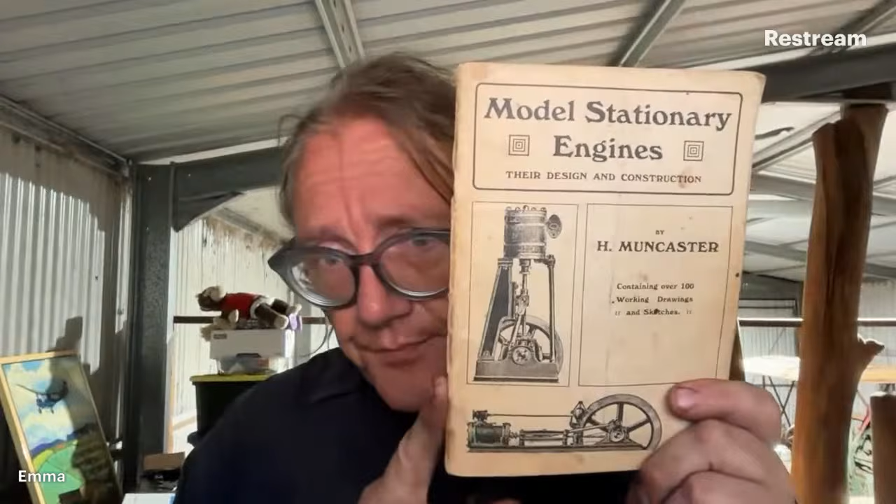What else? Spontaneity can be fun, yeah. Okay, well, maybe a steam engine project, because we don't have enough of those. Muncaster's engine, because the book's right here on the bench. Right, this is Muncaster's book. Right, this little engine on the front.

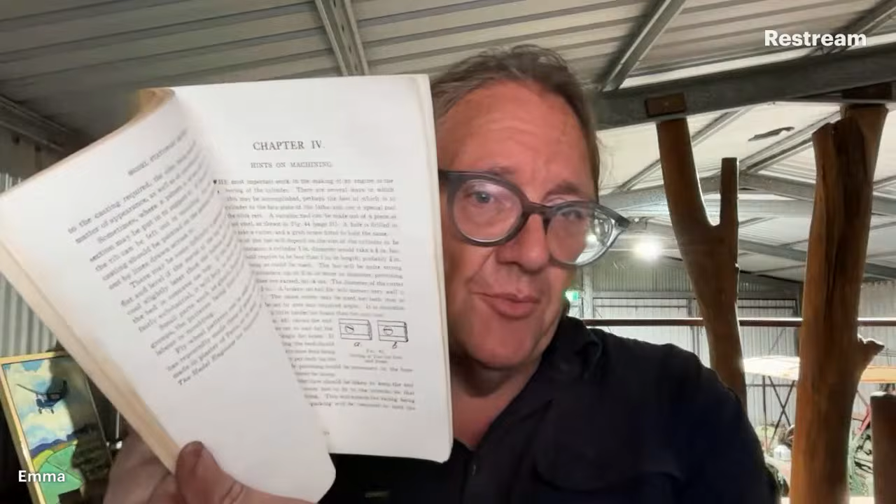Herbert Muncaster wrote for Model Engineer for many years. This book was published as some of his articles, or some of the more interesting articles that he wrote on engines. I've had this book for years, I think it's out of print now. But Muncaster, some very good engines. There's an introduction to pattern making.

Moulding and pouring, and hints on machining bits and pieces. And a lot of mostly fairly terrible drawings.

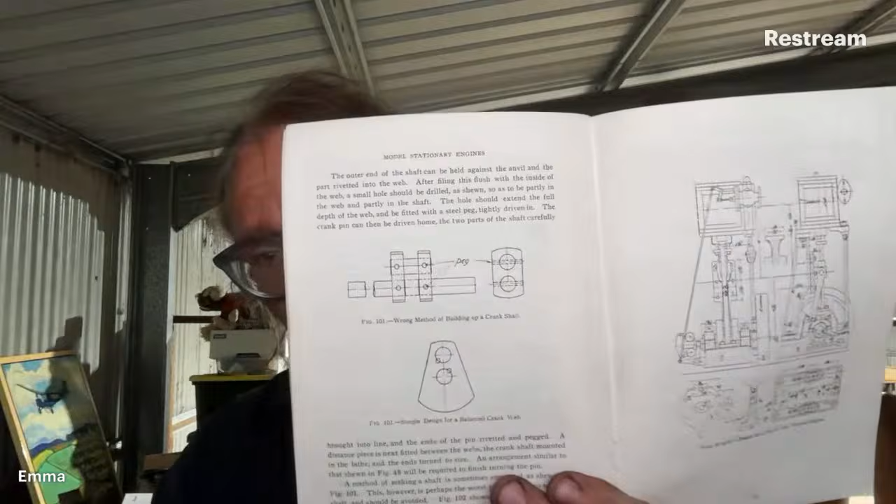Oh, look at that, so I made a start at this. Whoa, I'm going to turn that on. I'm not sure, is that better? That's probably better. I made a start on this engine some time ago.

But because there's about 5 drawings for different engines of a similar size that have the same parts in them - hey, Randy - you've got to look on a different drawing sometimes for the right bits.

I'm not sure what I want for launch without going down a rabbit hole, James, of actually thinking about projects that I probably should finish. I'm not sure I want to go there.

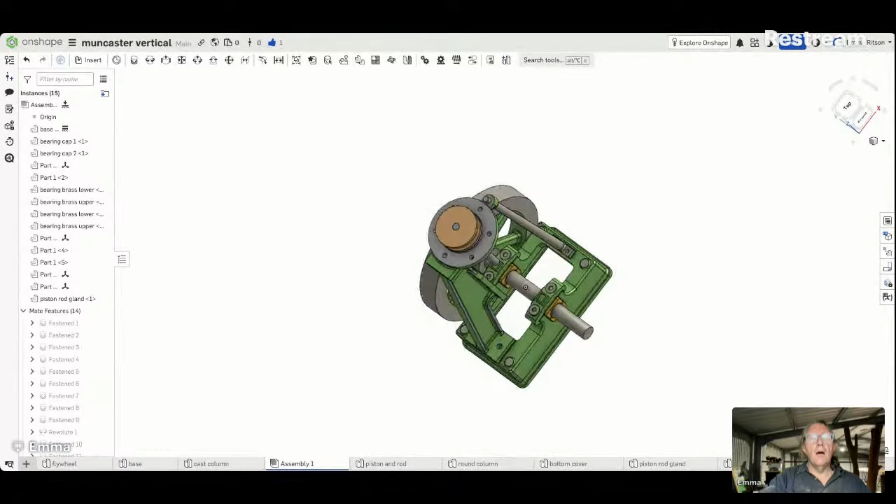So this is where I got to with this. This is quite a pretty engine.

It's the thing about Muncaster's engines as compared to some of the others, is that Muncaster didn't design toy steam engines. He designed proper industrial machines.

Proper industrial machines, to industry specifications and cutting edge steam engines, because this article was written, and the book was designed 1905, something like that.

Have a look here, first published 1912, this book. But I think that they were well and truly back issues of Model Engineer by then.

Looking at this, it needs a crankshaft is what it needs. We've only got a solid shaft through here. We've set it all out properly. There's our flywheel there on that tab, and our base, and the big cast column on the side, piston and rod, and the round column on the other side, and the bottom cover, piston rod gland, crankshaft, bearing brasses.

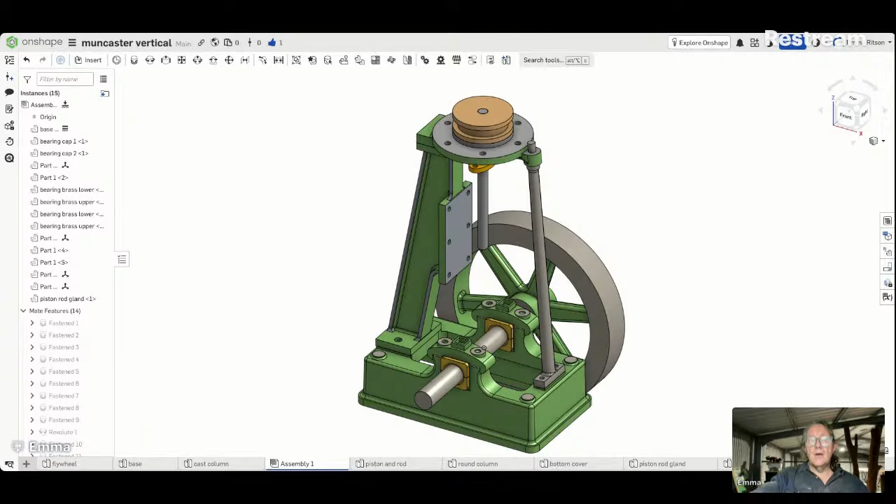So if we start here on the crankshaft, we've only got to change this and refresh the assembly drawing, and it'll refresh in the assembly. But we need some information before we do that. And I'm going to take my glasses off here because I can't see a thing.

And back to back on this 1 5/16. According to this, it's 3/4 inch throw. It's 9/16 between the cheeks, and 1 5/16 overall. That should be pretty straightforward.

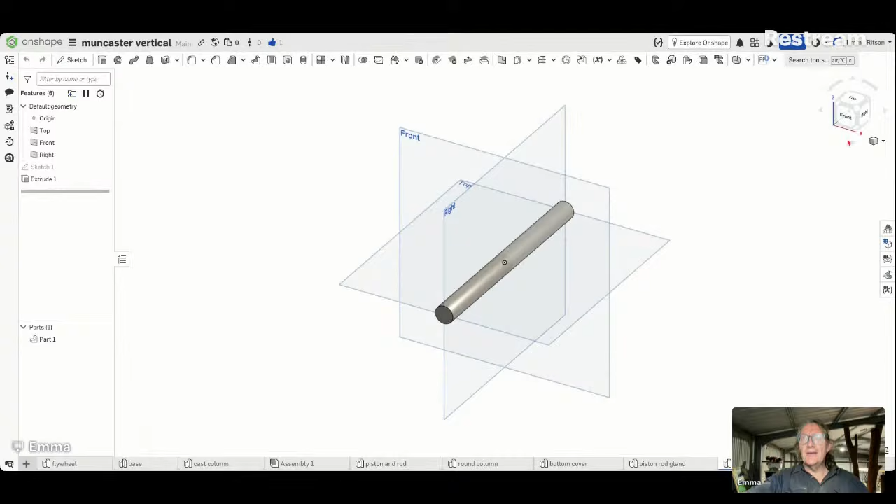If we draw a picture, click here where it says front. I'm going to draw a sketch on this end, on the centre there, and a circle and a construction line. 1.5 inches is our throw.

Now we can draw another circle there. If we get rid of the construction line, we can draw another circle here where that intersects, and we'll call that 1/2 inch. We're going to do this way.

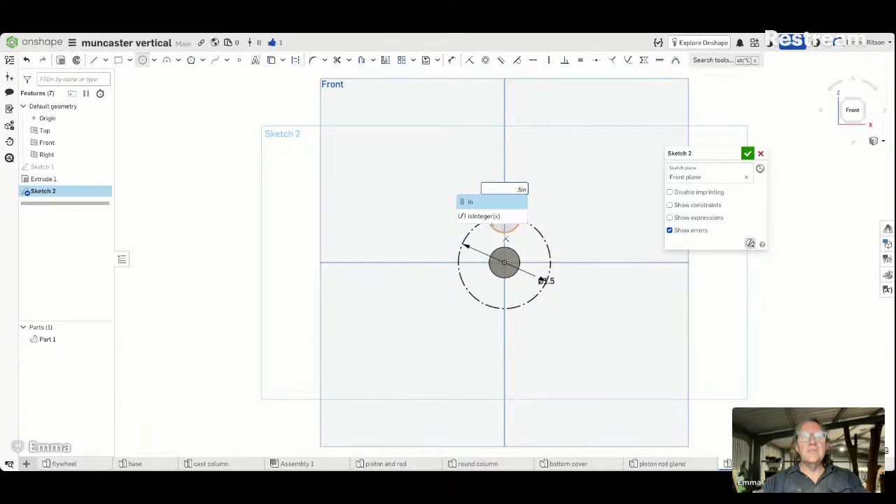What happened there? Don't know. This might be already set up, I think, for... So there's our centres. The crank webs, there's a picture of how to fabricate up a balanced crank web. We're going to try something like that.

Must be big enough to go. We'll draw another circle. That looks about right. 2.125, let's do 2 1/8, let's call it that.

Not quite big enough. This measurement here, we can just drag that around where we like. 2.25 we're going to try. That looks better.

And he's drawn a line down here, something like this. It doesn't matter much what it is, and we could work out the balance if we wanted to, but that looks reasonable there.

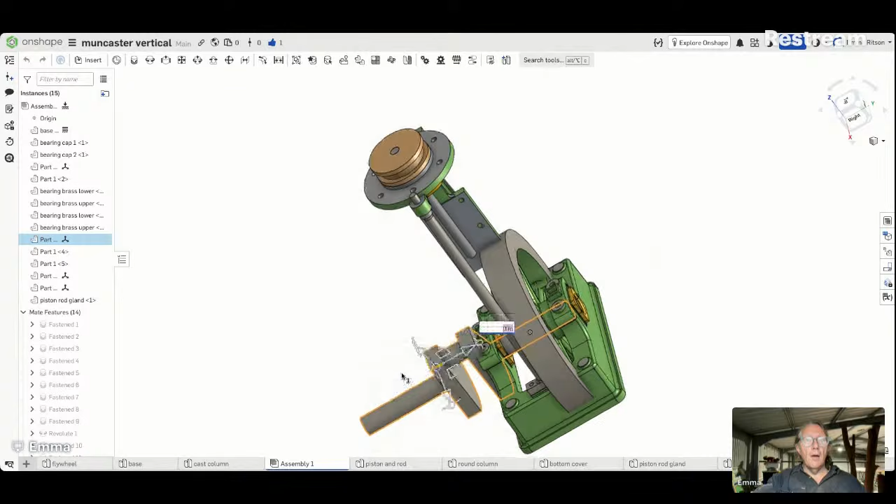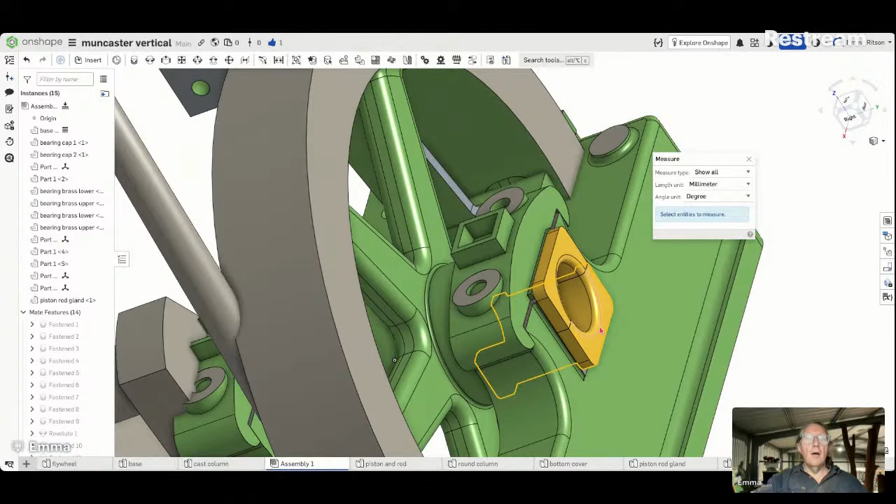Because it didn't work. I'm going to measure this while I'm here. There's a radius on there. So we need to find that radius before when we put it back in, or we'll have some interference.

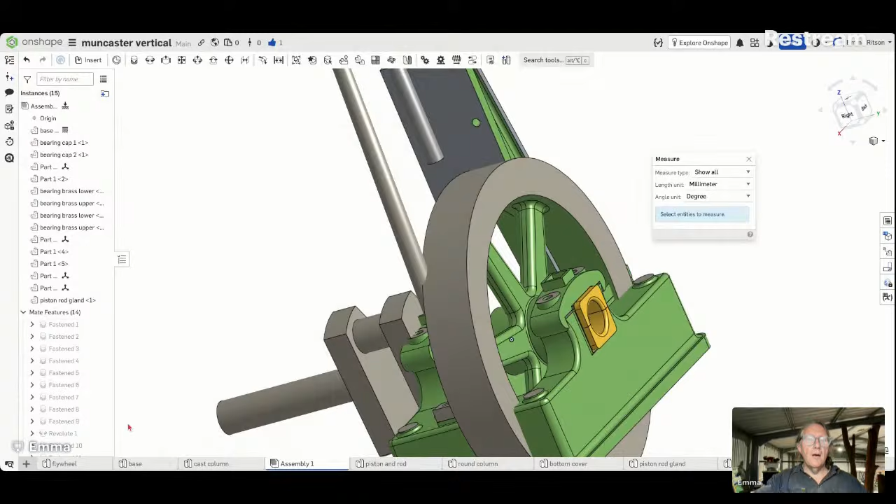Now, this is fastened somehow, Revolute 1. Is that the right one? That's the correct one.

So let's edit that. Let's move it from the center of the crankshaft to there. That's not how we want to do it. That's still not quite right.

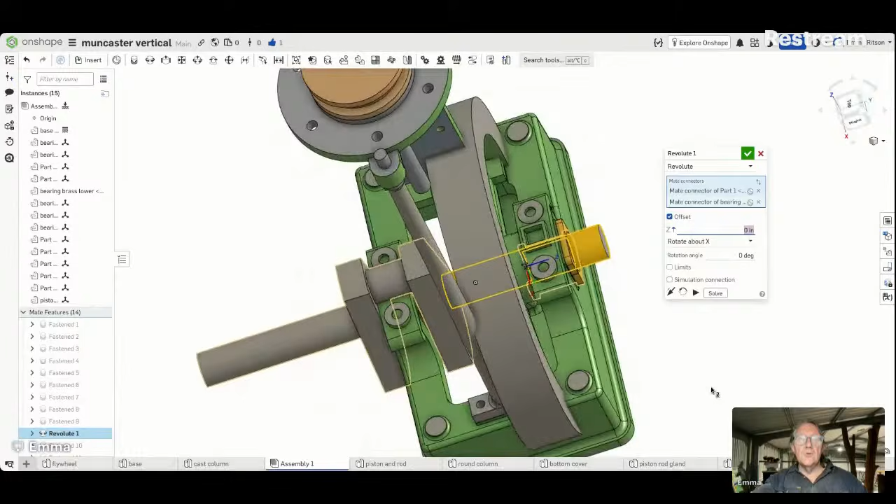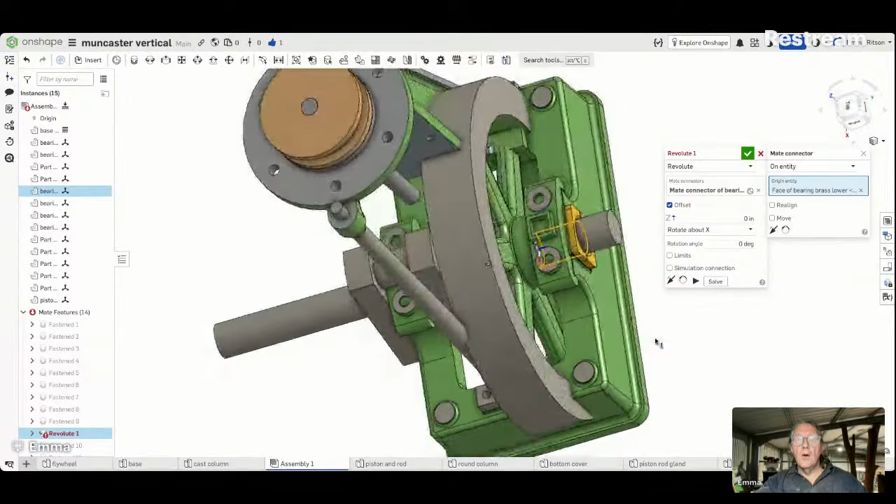But what we want to do, and find this. Not there. Let's just get rid of that. We'll get this back here out of the way, and then we'll set it up properly.

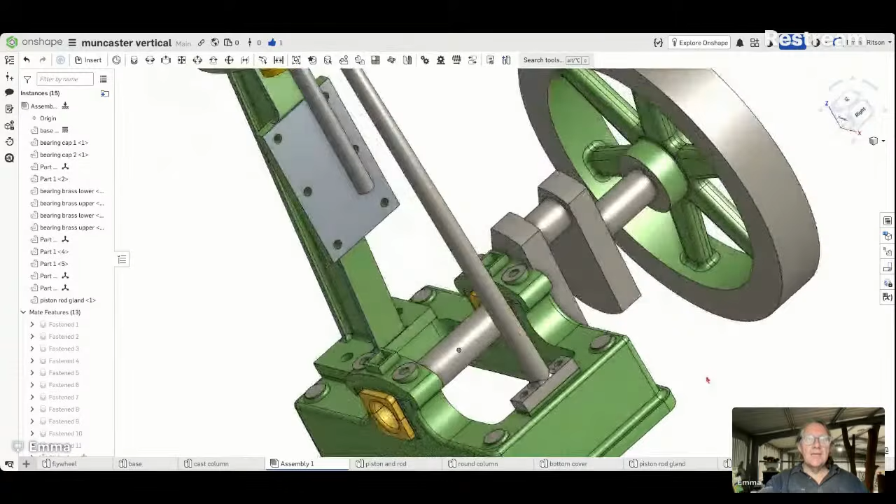So a new revolute mate, so that it turns on there. Is that right? No, that's not right. It's this one here.

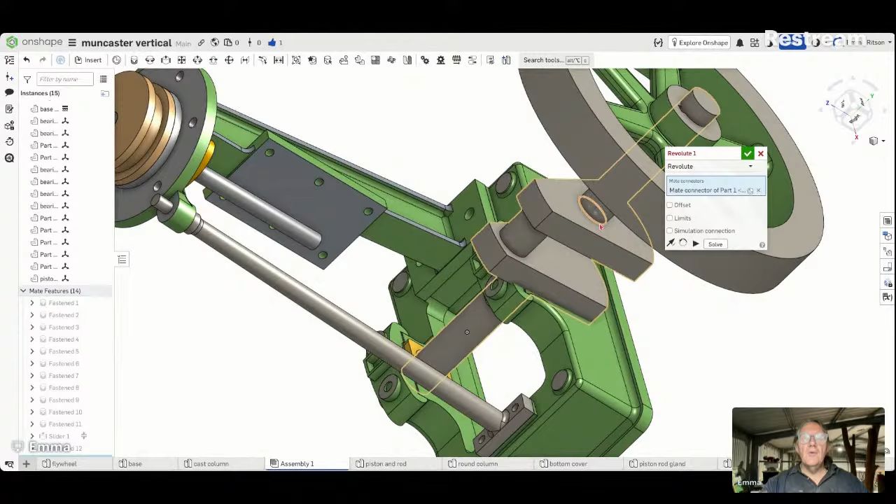See, I'm a bit sort of, I really appreciate people in the chat because it gives me someone to talk to. What we really want to do is set this up here on this edge of the bearing.

Interesting. Why won't it do that? It's a split bearing, of course.

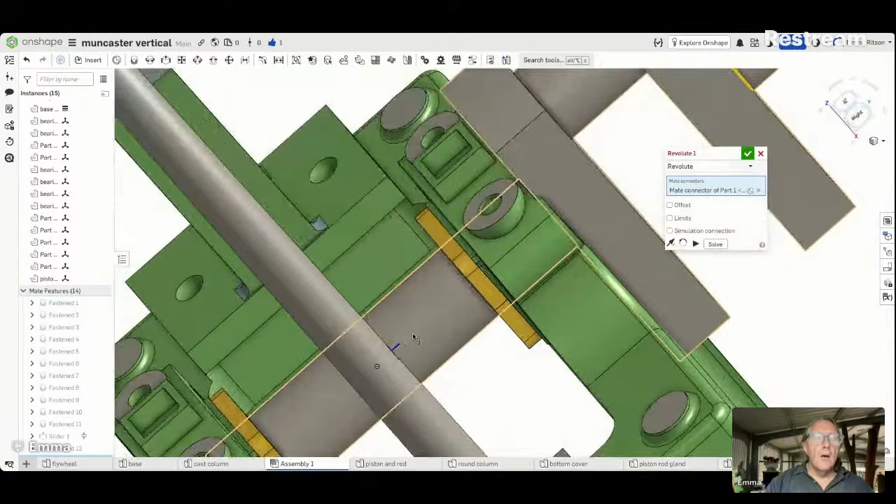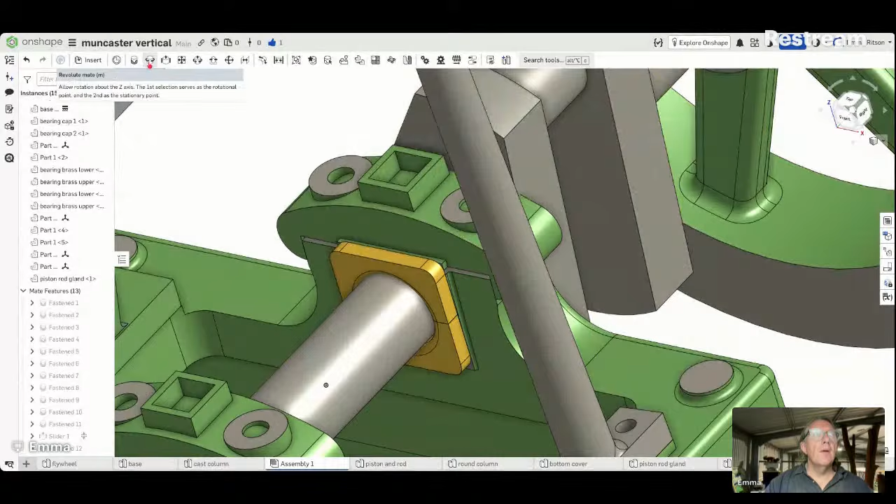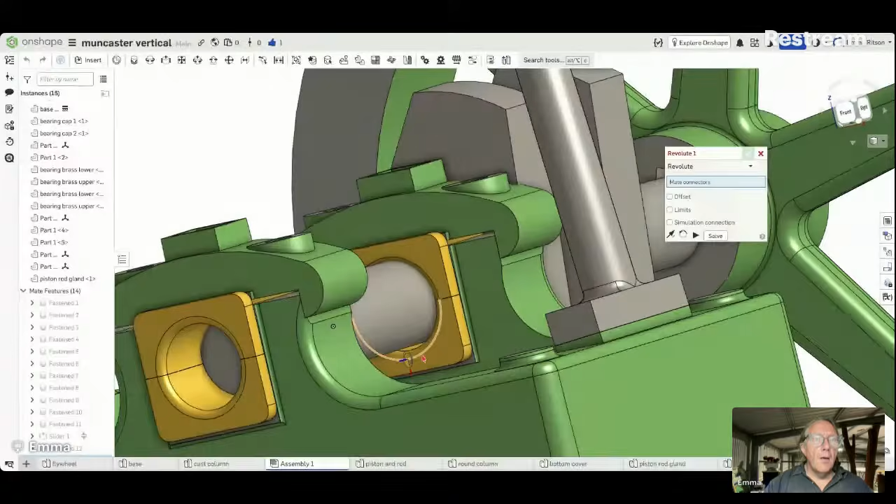What a revolute mate, off there, off that radius. And that's not it. Why is it so? Let's try again. It doesn't like me very much tonight.

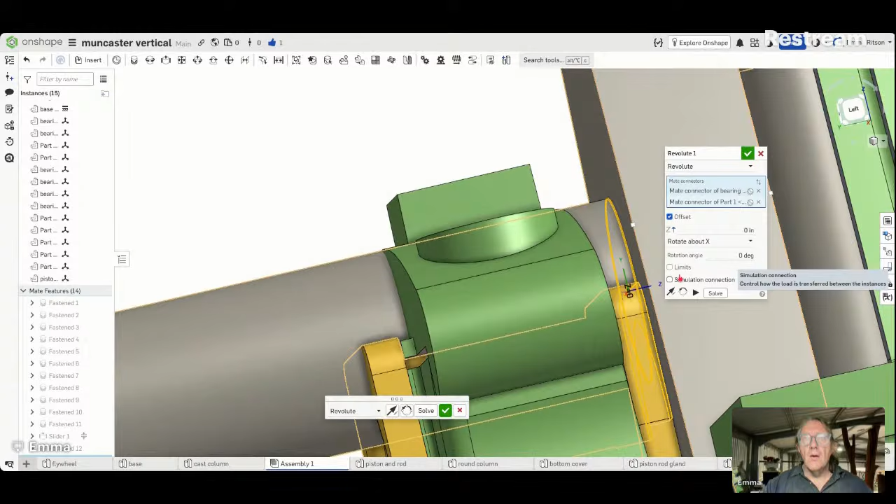I think we're going to live with that and probably just offset it. That's a bit terrible, but in the Z direction. It doesn't work. Let's get this out here so we can see it.

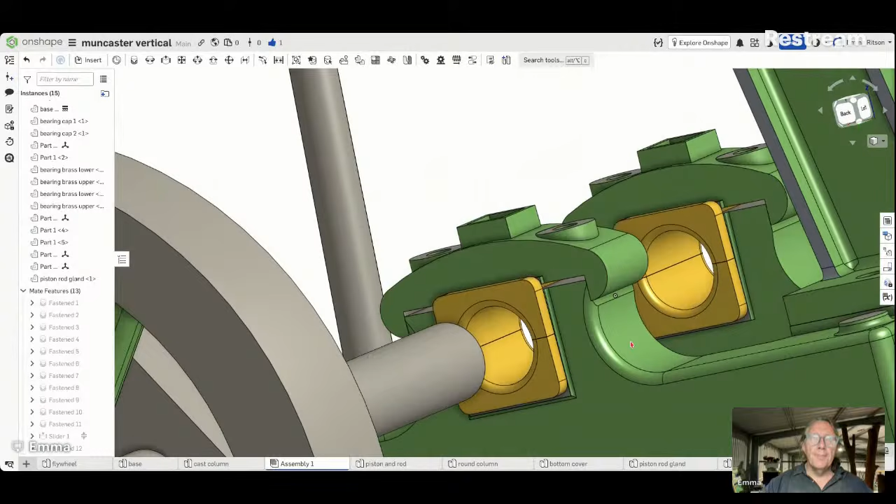We can skid it out because we've got split bearings. We need to find a center that we can work on. And probably the best way is to put a mate in there first. That's easy, see? If we put a mate there, on the origin entity there, and click OK, we've got a mate there permanently.

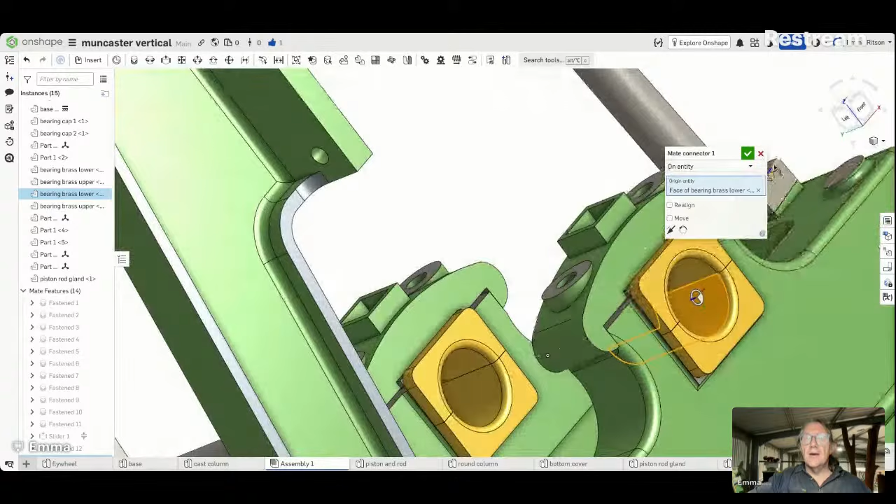And now we can put a Revolute mate connector between this one here and this one here. It's not quite right because we haven't allowed the thickness of the bearing.

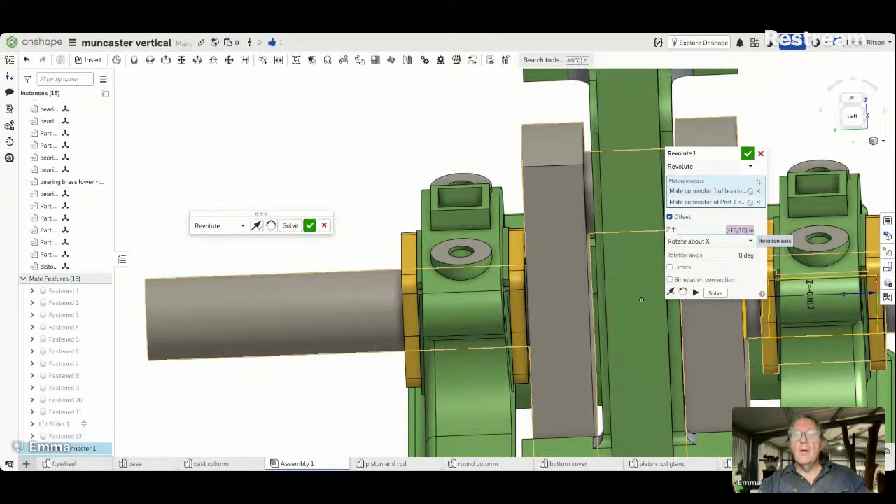And the thickness of the bearing is 13/16, so we can certainly offset that. 13/16, like all oldie worldy measurements.

So there we go, the crank's in place. Not quite right, is it? This works here, but this one doesn't. So we've got a gap there.

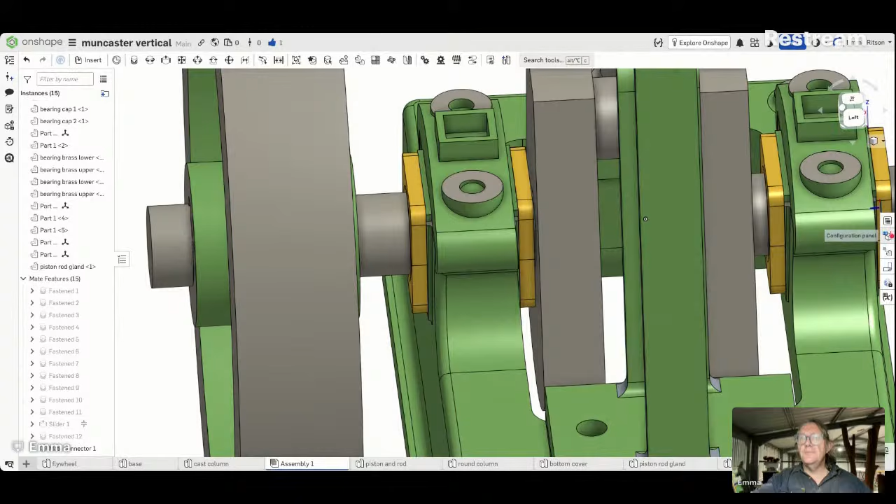If we measure that, between there and there, which axis is that? In inches. That's the y-axis, is 107 thou.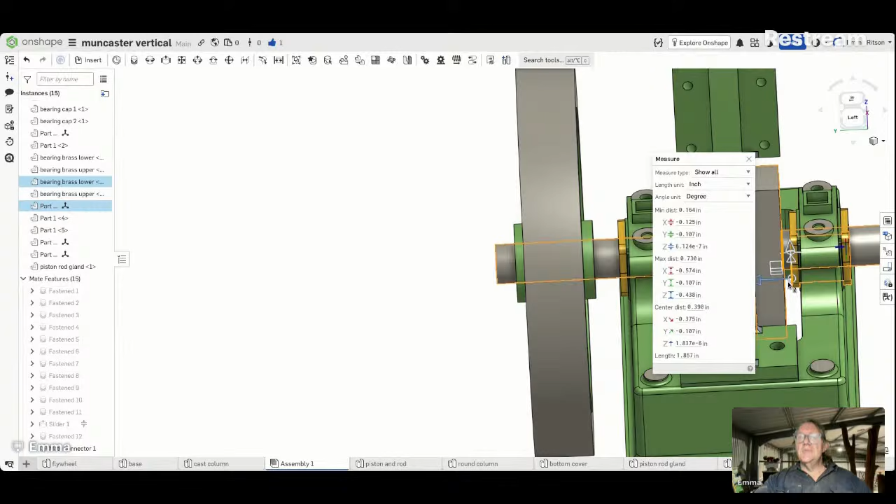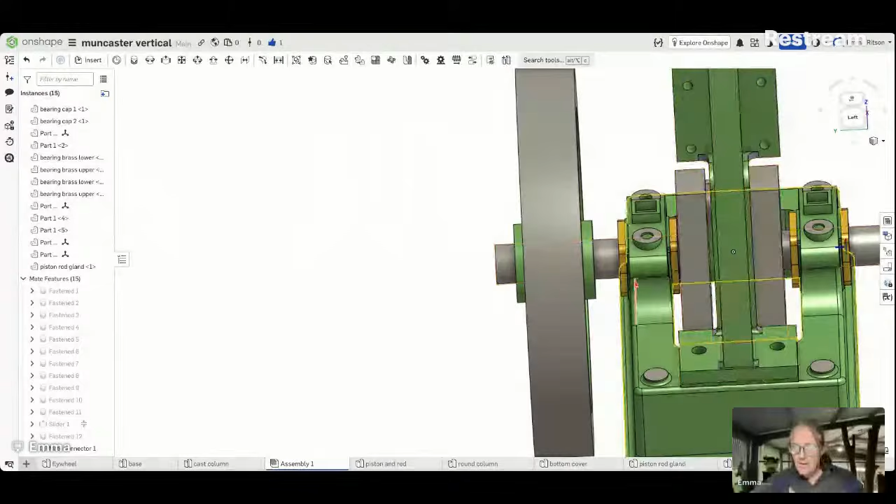So what we're saying is that this crank is 107 thou too narrow. You take care, James. I'm pretty good at talking to myself. That's kind of all we're here for.

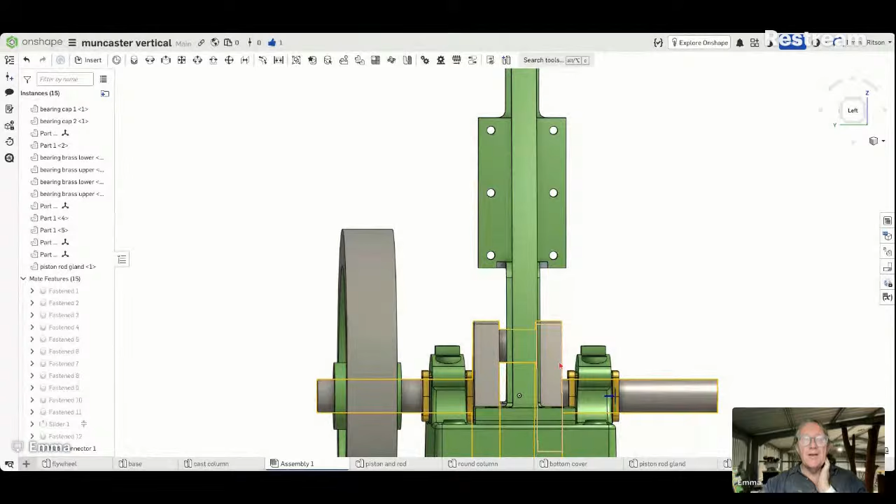So look at the left here and see if it's actually offset. It is. But these need to be a little bit thicker. And it's 53 thou, something like that on each one. And have a look.

Let's extrude 2, we'll edit that. 428 thou, is that right? 0.428. Let's have a look at that.

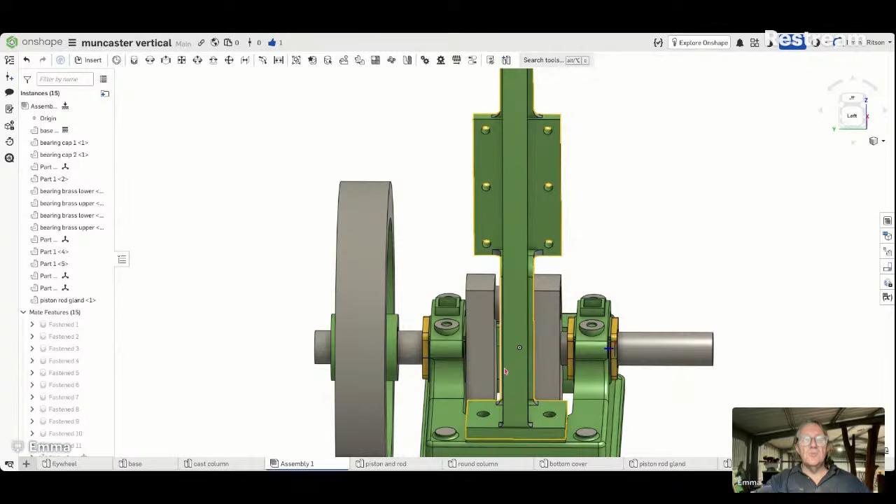Something's not quite right because it didn't readjust itself. It should have moved that way. Let's have a look here.

This says 13/16, is that what it says? It's very small print. Definitely says it's 13/16. Let's have a look here. This says 750, so that's why we've stuffed that up.

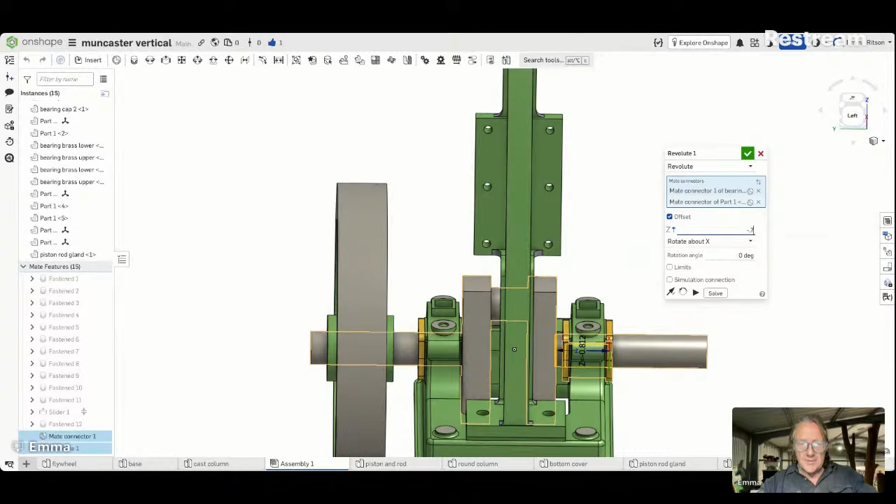Let's do it again. 0.75, there we go, fix that. Almost fixed it.

Why is that so complicated?

Have a look at this. We're going to measure and tape out again and measure between there, and there. Inch and 7/16, 1.438. Why is that so?

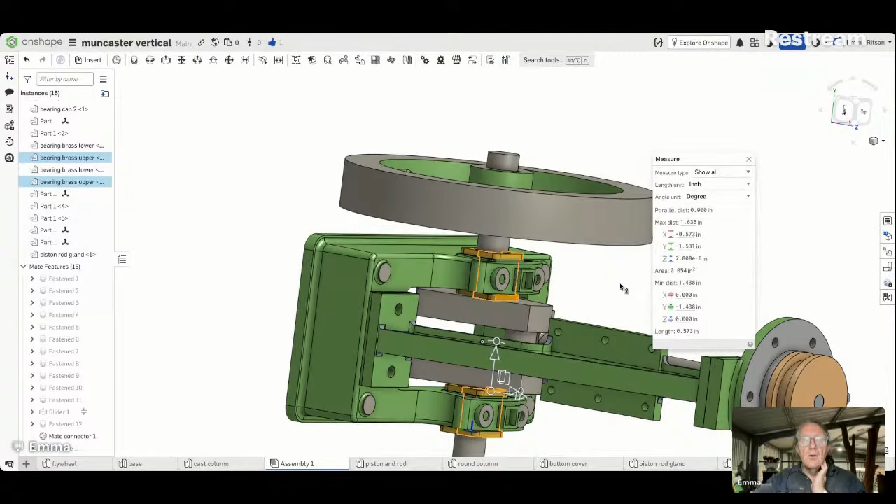Okay, let's go back to the start and try again. We're getting nowhere fast here. Let's measure this distance, this distance. We're out, nearly 1/16 of an inch.

So extrude 3, extrude 2, edit that. Inch and 7/16 we said. Half inch is 8/16.

It's 16/32. And 7/32 is 23/32. You gotta love fractions.

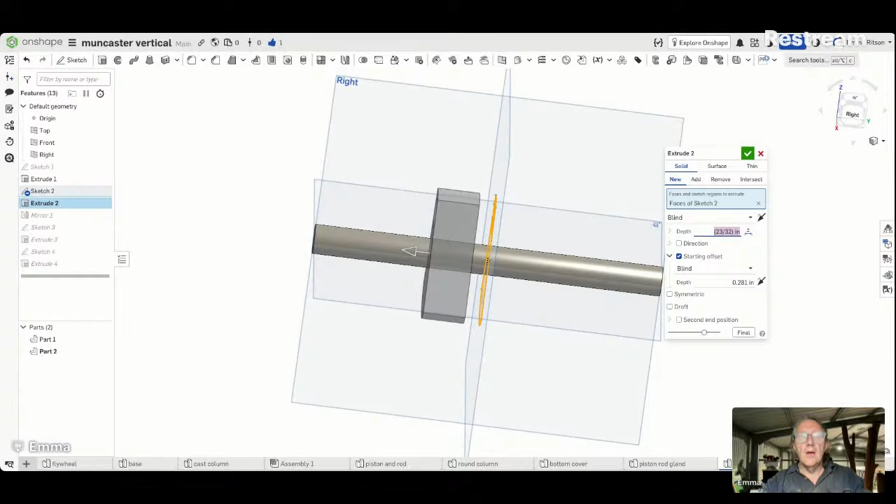And it looks nothing like it should look. Not even close. Are we ready to give up yet?

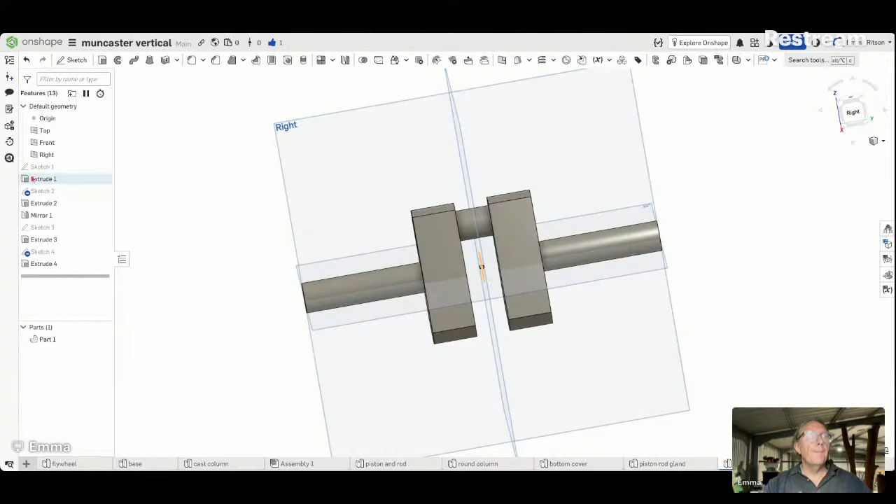23/32 must be right. Inch and 7/16. Inch is half inch is 8/16. A half of 1 inch is 8/16. Half of 7/16 is 7/32. So 16 and 4 and 3 is 23/32.

Let's do this differently.

If we do that and put that in there, how does that look? See, it fits, very close it fits. It does fit because we're over this one a bit and we're under this one. So that's right, we got that measurement right.

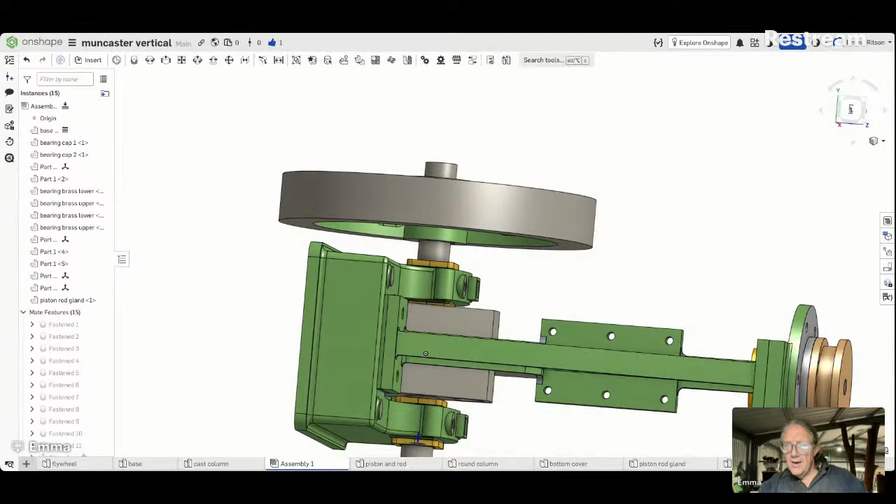Leanne, we're not doing very much, to be honest, darling. We're fuddling about is what we're doing. I've come into this without any thoughts about it all day.

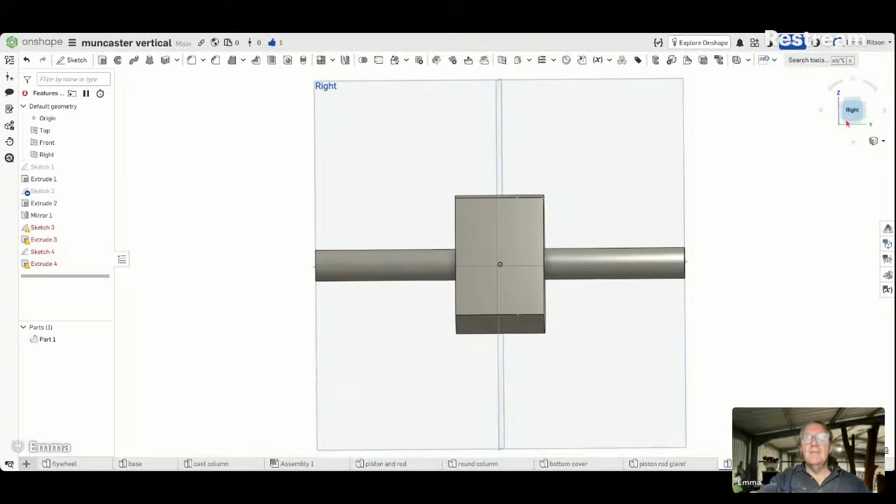If we do it that way, and then we delete some of these because we don't need any of these. Don't work anyway.

And delete that. Delete that. Delete that. Delete that. There we go. Now,

looking at this, the distance between there and there, according to this drawing, should be 9/16 of an inch.

Let's put a sketch on this plane. We'll start here with a center point rectangle right on here. And we'll go across here 9/16 because we can put a fraction in. Another one doesn't really matter.

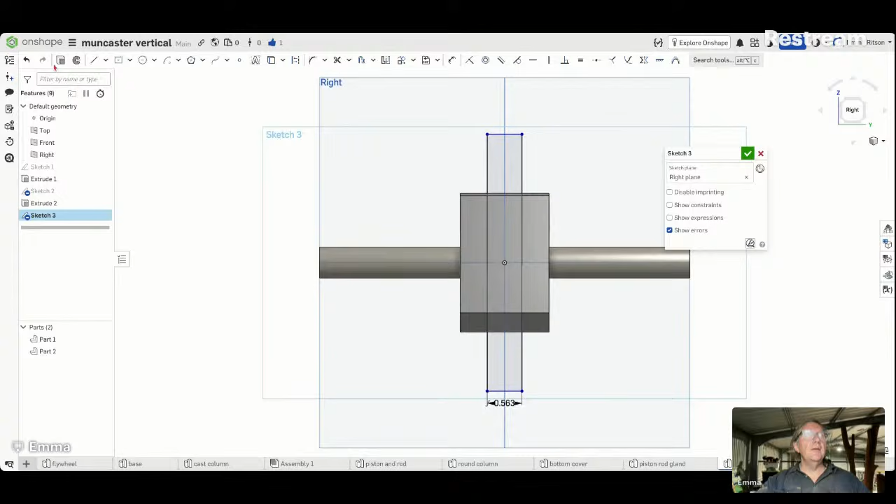And then if we extrude that, remove it, symmetrical, merge scope that. It's going to need to be a bit more than that. That should have fixed it.

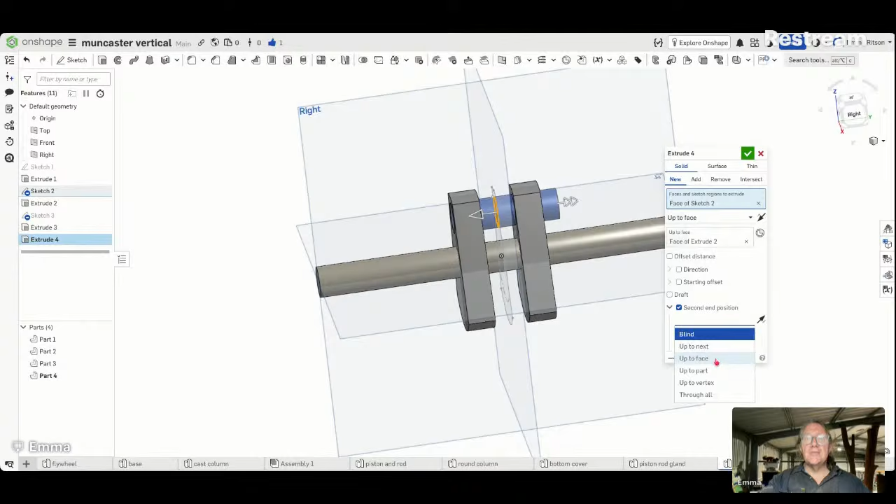Now, rather than go blind, we can go up to face. And we can select this face here, and that goes just right. We go second end position and we can go up to face again. We can go to this face, and that puts the crank part in here. If we click add, and then merge scope that, let's put that in there nicely, see?

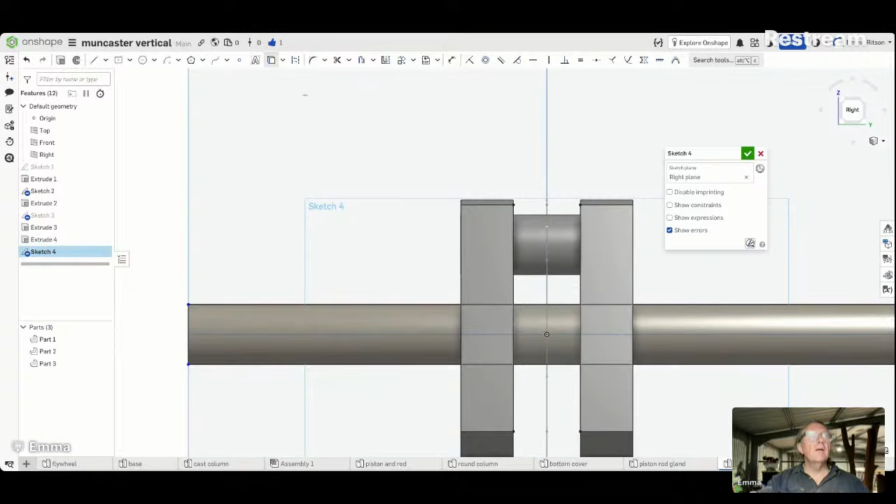Now, new sketch on this plane. And probably the project tool. There. And extrude that, remove it, symmetrical, so it goes right through. And merge scope is that.

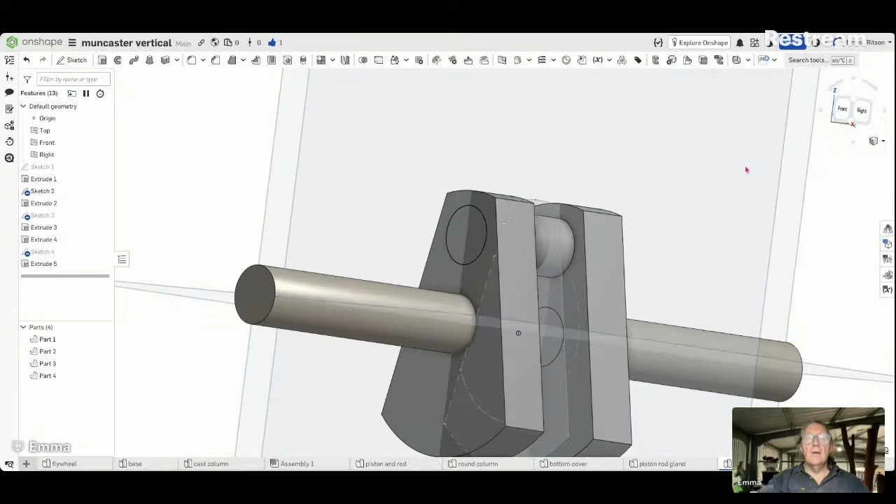Which doesn't work because it's in red. Let's try that. There we go, look at that. And then we could go Boolean union, add that and that and that and that. Click OK, and we've got it all in one piece. And if we have a look back at our assembly, it's completely missing, because we've pretty well got a new piece.

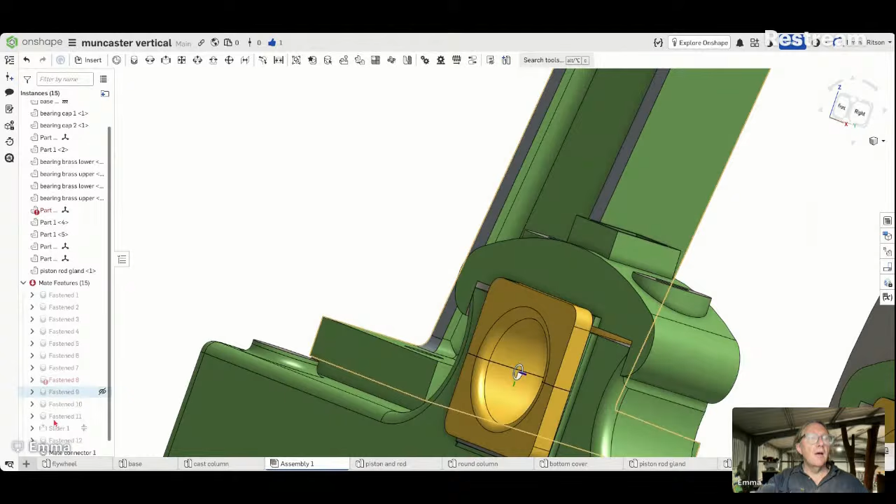Now, if we look at this here, there's our problem because this mate connector - let's edit that.

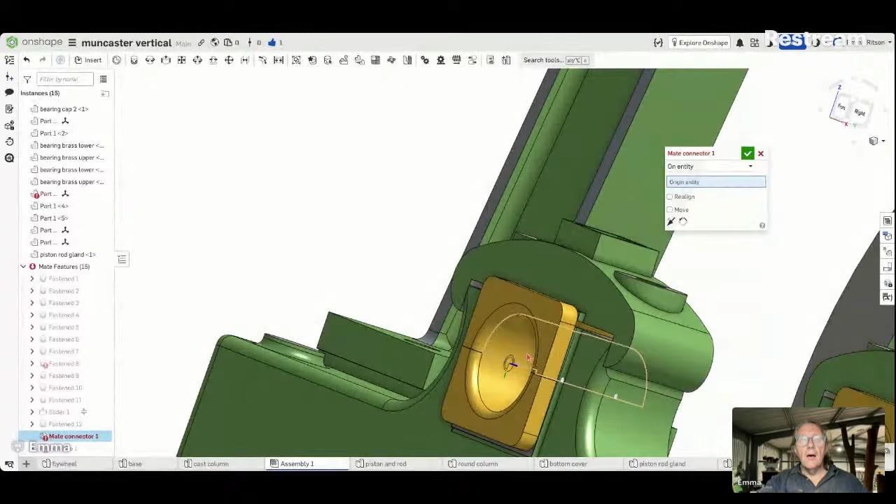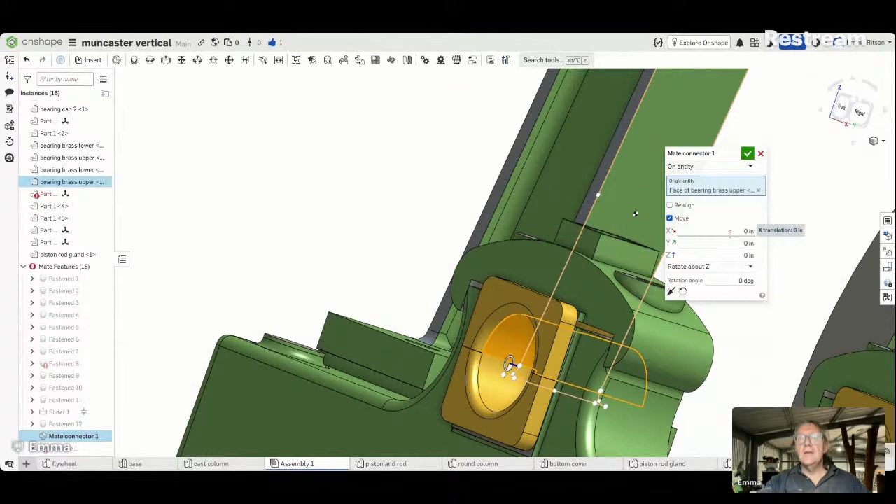That's all very well, but it's there and not on the outside. So we click move. And now X, how much is it? I guess we should determine this before we do anything. We should determine this radius.

Bearing brasses. We'll open that and we'll have a look. This radius here is fillet 10. If we click edit, it's 1/16 of an inch.

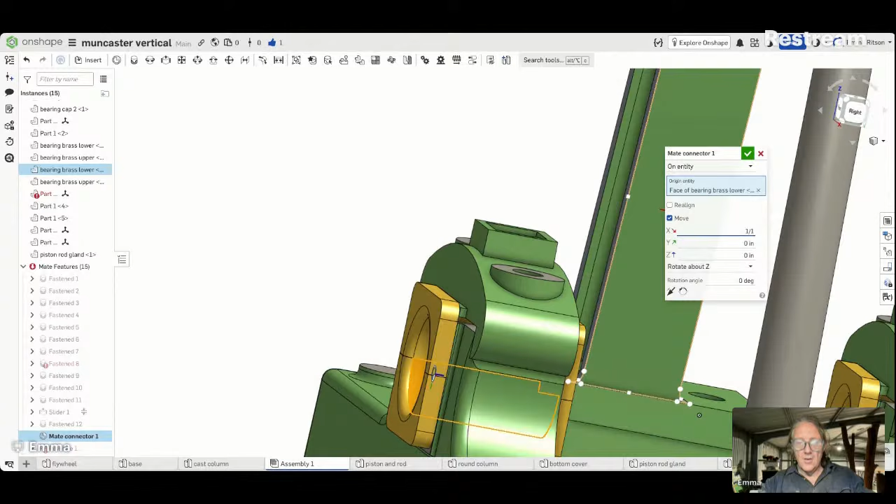So if we come back here to our assembly and back here to our mate, and we edit that up, move it a sixteenth of an inch.

Wrong way. Wrong way again. Wrong way. Negative thirty-second.

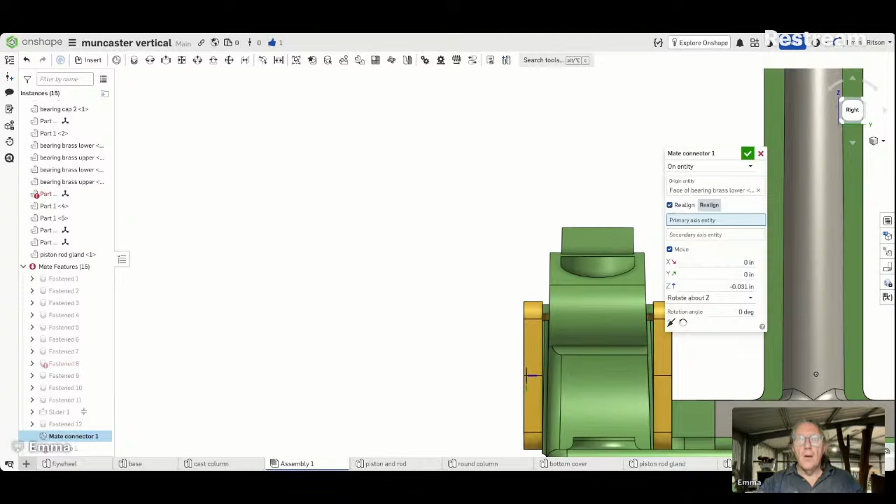Not winning there. I don't know why that is. Don't really get that.

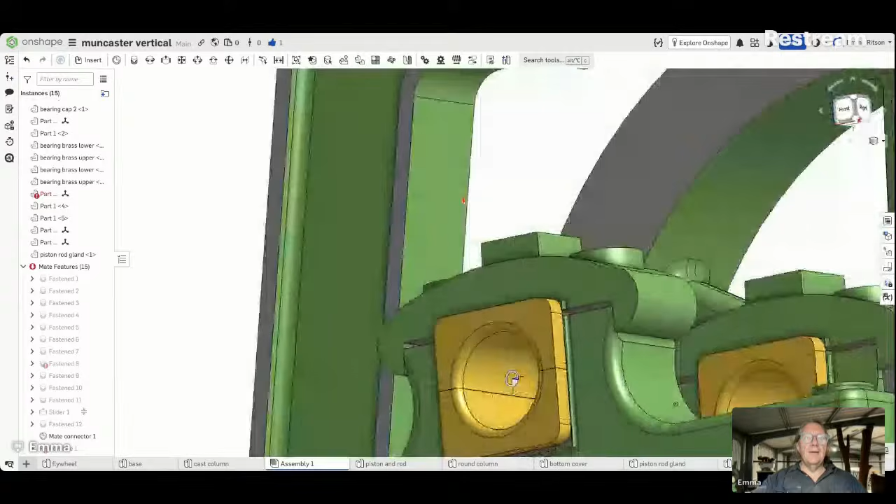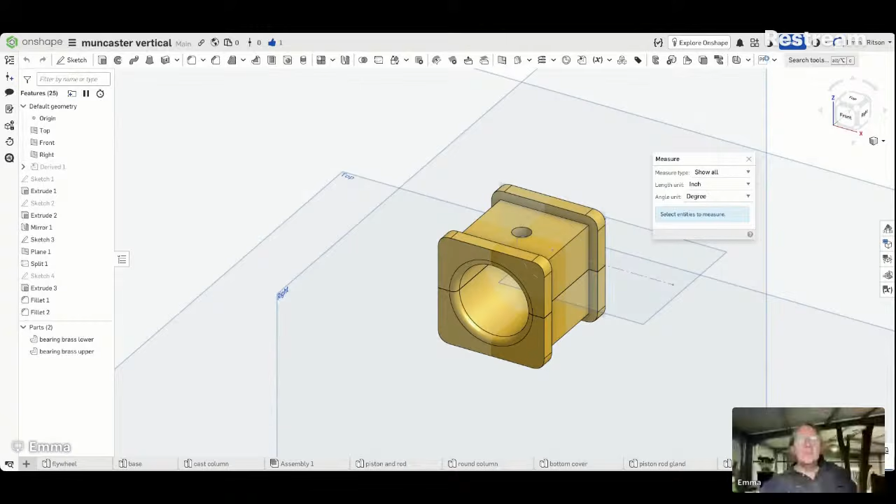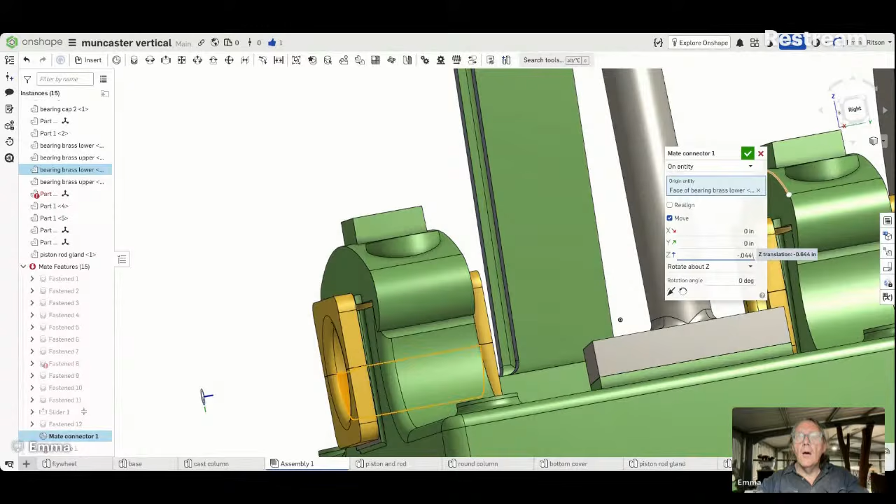Well, that should be right. That should be the right place for a mate connector. I only see one problem with this - it's on the wrong end.

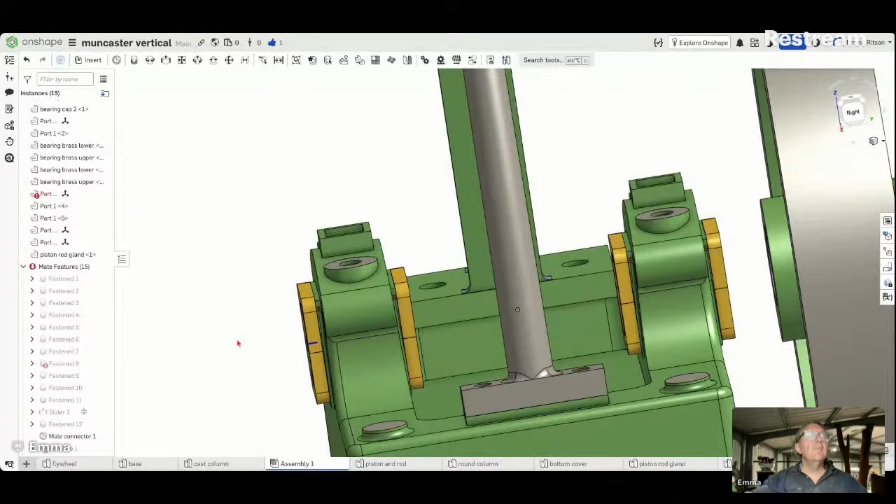Can we guess it? Let's insert the crankshaft. There you go. Because they're both on the same origin point, everything adds up nicely.

More or less. What we've got is a gap in this one. So there's a gap there. No gap there.

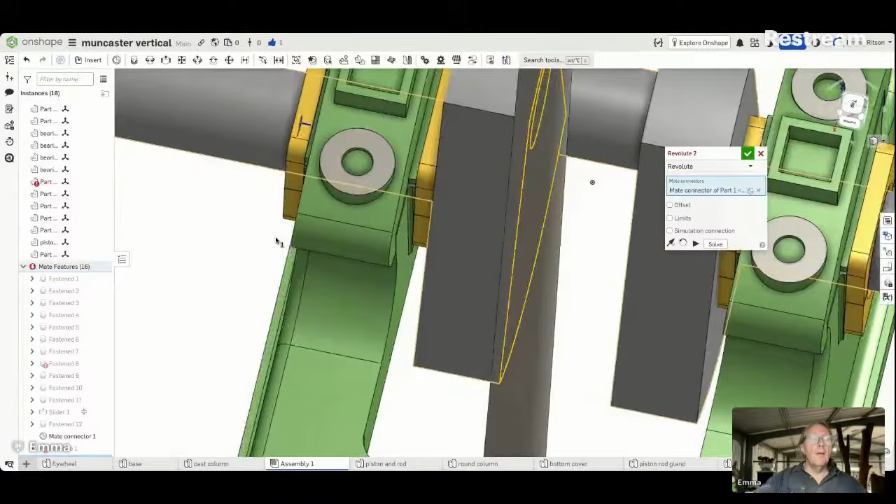Now we're talking to it. I think we've got it.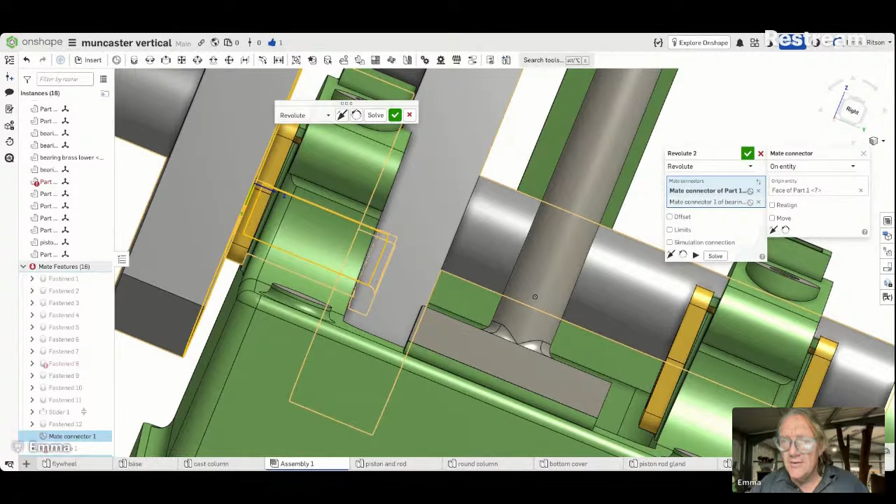A short but loud thunderstorm. Sunshine on the Gold Coast. Bundaberg is flooded. Out west is a bit flooded. We had a lot of rain last night, but

Can we sneak across here and measure this? 438 is 7/16. Of course, it's closed that.

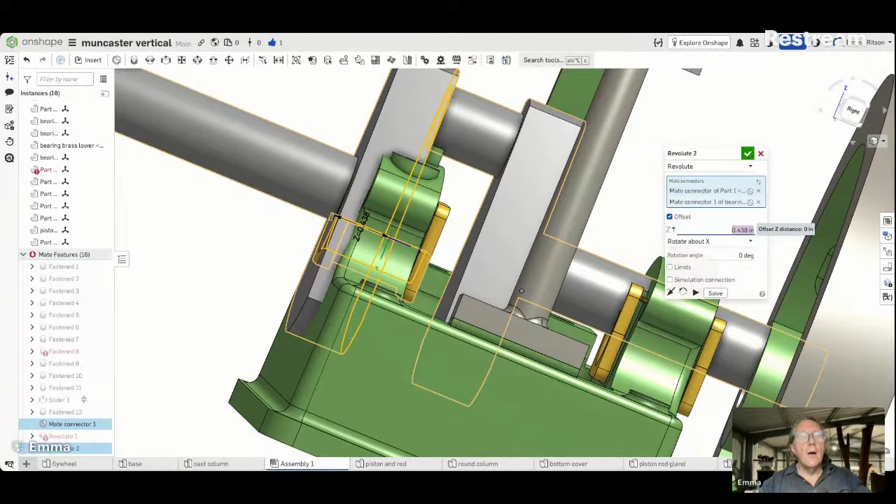I don't know. I'm about ready to give up on that.

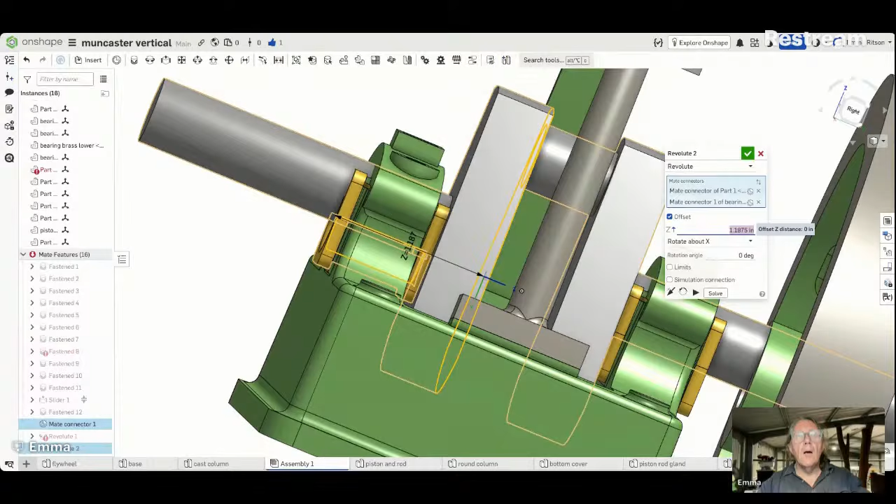I think we fluked it, but that's all we got. Sorry, guys. And we know it lined up there. So what have we done there?

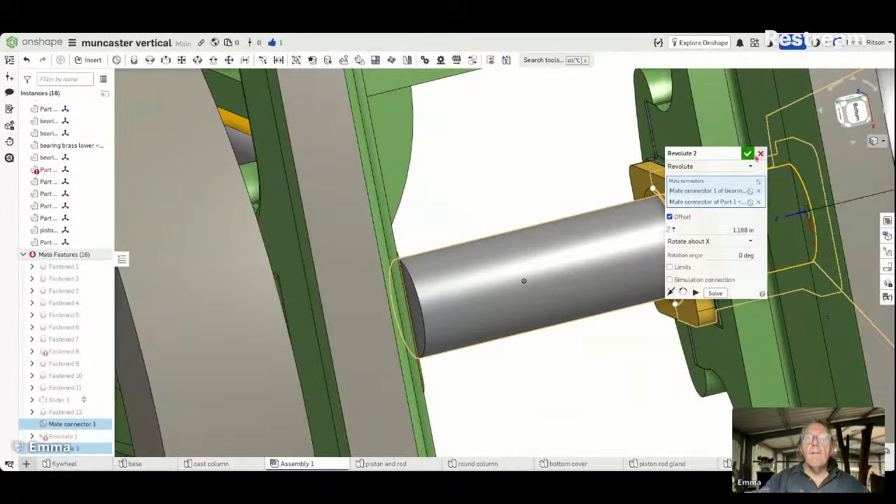Let's fix it up. Let's reverse it. I'm not feeling it tonight. I think we should just talk about other stuff, not worry too much about CAD.

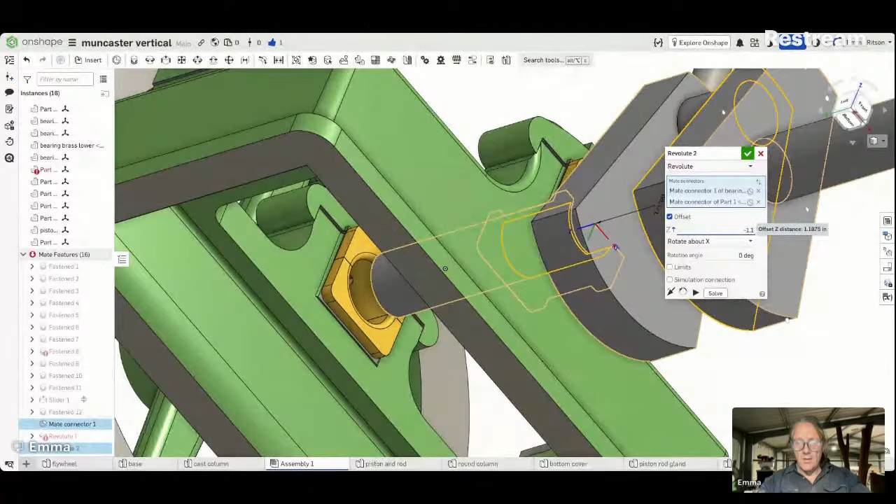Anyway, it's in the right spot. If we animate this,

we've got the crankshaft working. There we go. Hey, Mark.

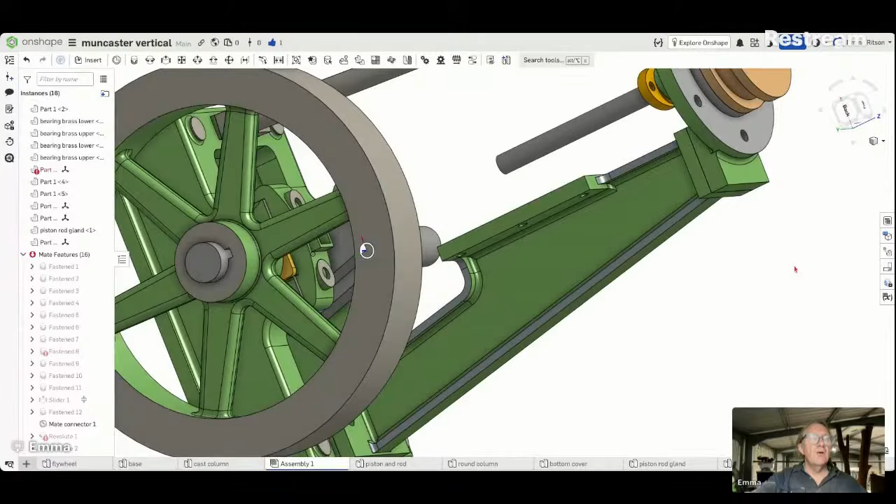This is Muncaster's engine, Muncaster's 1.5 by 1.5 inch vertical. It's not even a project enough to be called a project. Let's fasten this to this. But it is a CAD project.

Put that there like that on the end. We're going to offset that just for looks. Once we work out what we're going to offset this, that one.

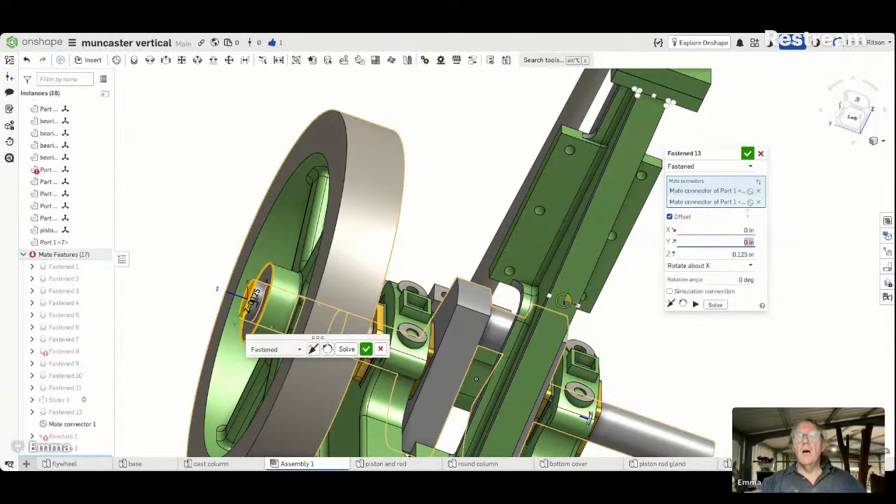And now if we animate that one, move the flywheel too. So we have a crankshaft.

That's where we're at with that. I guess that was worth the trouble. That took me an hour that I really wasn't thinking about things. That mate connector looks a bit ugly when you can hide that though. It's still showing the animation there.

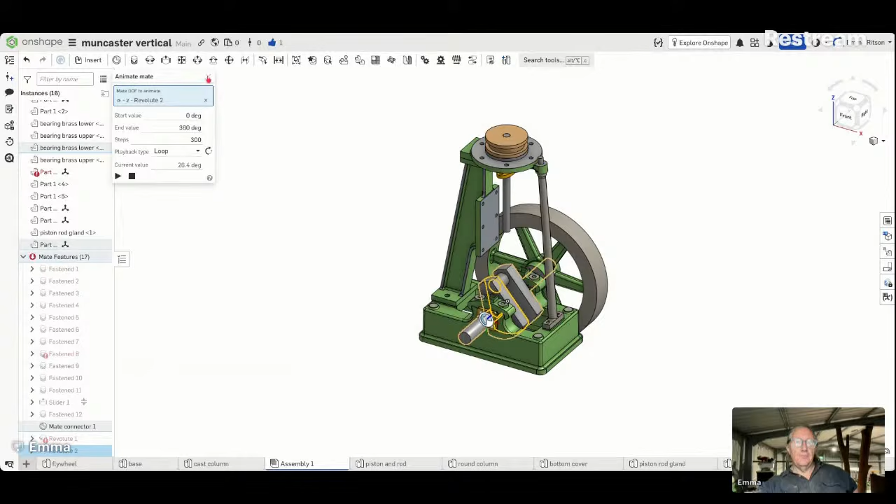So I don't know, I've got to get my head around this again if I'm going to do any work on it. I haven't messed with it for a while. And I'm not sure I'm going to mess with it anymore tonight. But it's quite a pretty engine. Anyway, let's go back to the talking head and just have a talk, because honestly, CAD's not doing it for me at the moment.

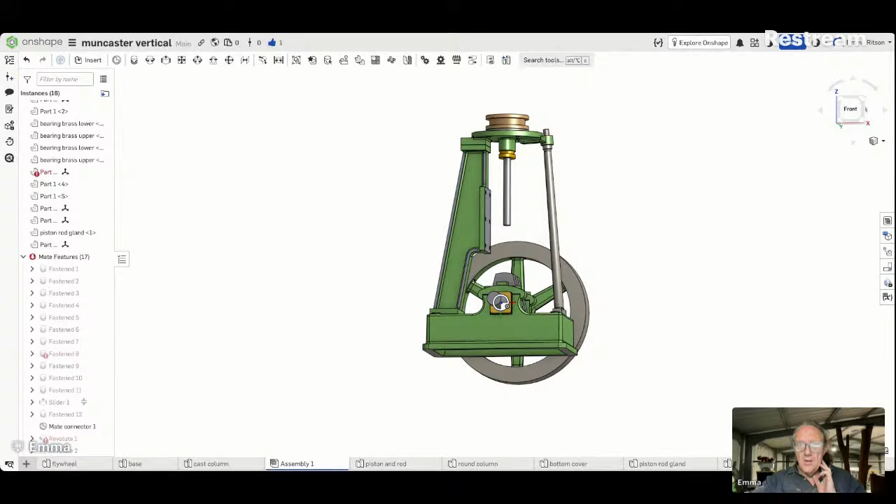You won't see my Beyer Peacock engine because my mate Phil took it with him to get it sandblasted. So that's something you won't see. But we did get it free with a lot of hard work and desperation. And we'll get it sandblasted and get it back here and get some undercoat on it and start thinking about boring it out and putting a sleeve in it.

See how that goes. We've got electricity tonight, which is really nice down the shed. We didn't have any last night as it rained, like it bucketed down for hours.

I've got to go to work tomorrow. I'm not that enthusiastic about it. I'll be fine, I'll get there, I'll be fine. Work goes pretty quick once I'm into it, but getting there in the morning's a bit difficult, especially if it's raining.